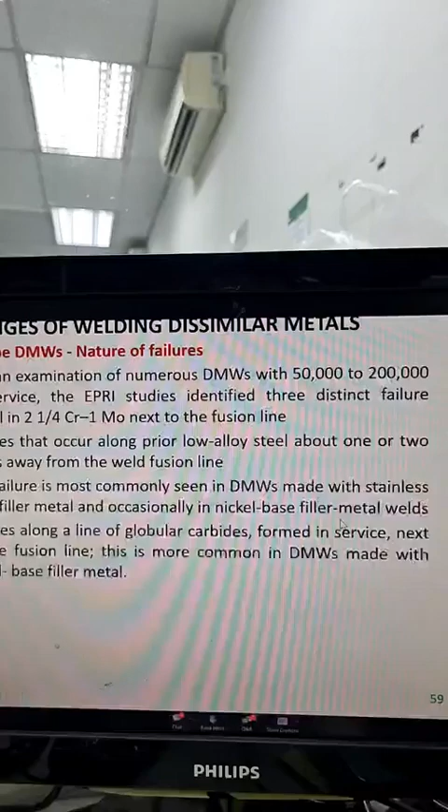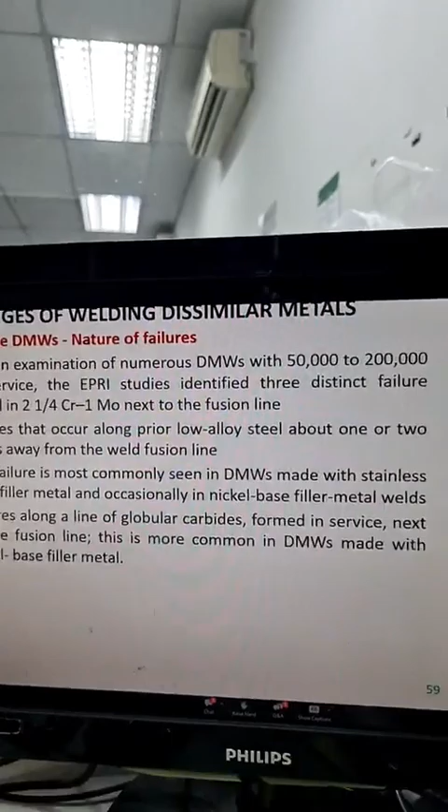Another category was failure along a line of globular carbide formed in service, again next to the fusion line. This was observed while the weld was carried out with the nickel-based filler wire.

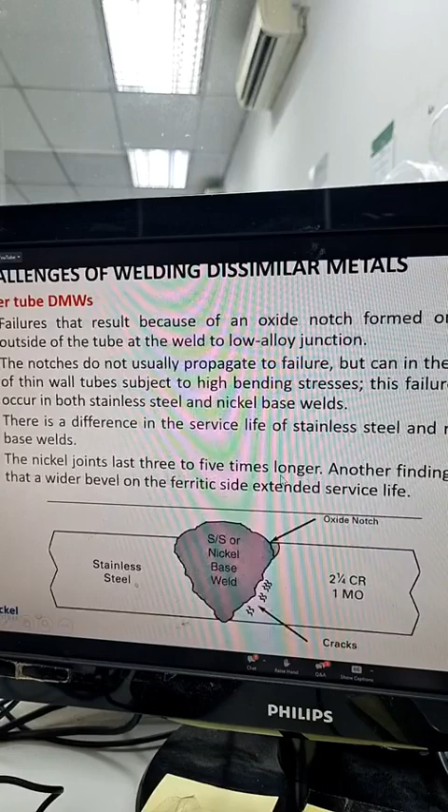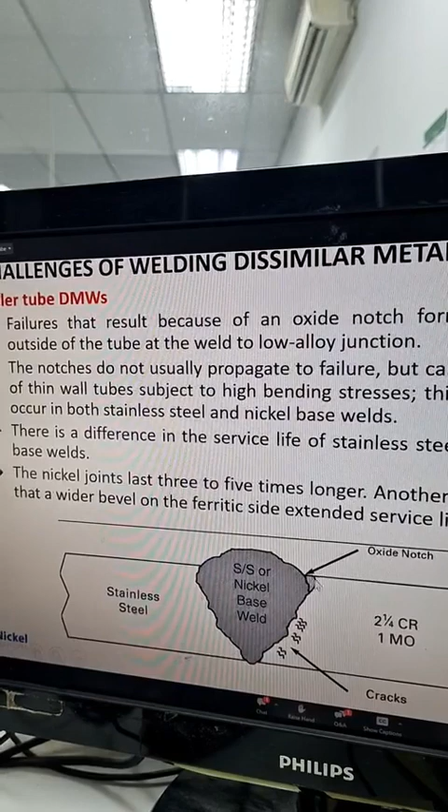Another type of failure was attributed to the oxide notch formed on the outside of the tube at the weld to low alloy junction. You can see here an oxide notch. The notches generally do not propagate to failure, but can, in the case of a thin wall tube subject to high bending stresses, initiate a failure.

What they observed was the nickel joint was giving 3 to 5 times longer life, while the stainless steel joints had a very limited life. Another finding was that a wider bevel on the ferritic side also extended an increased service life.

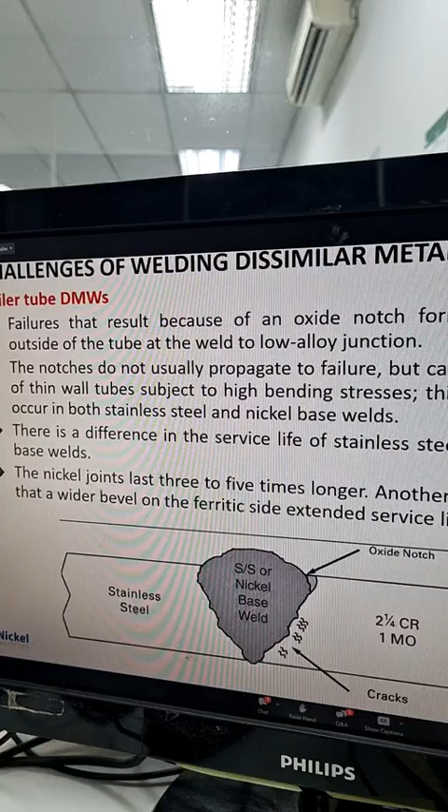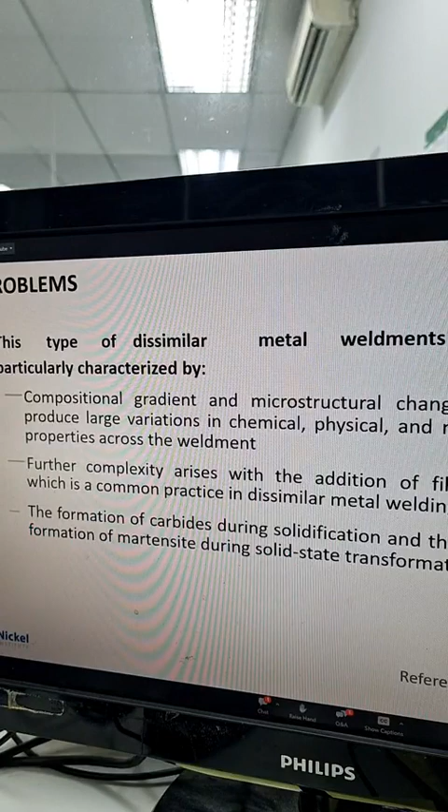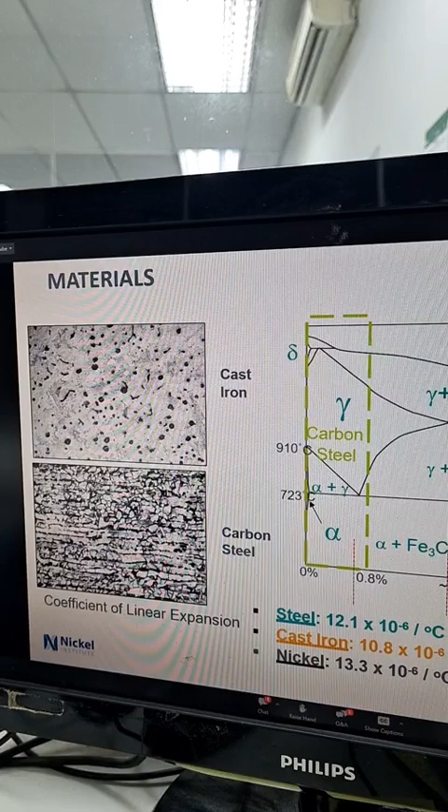So what was observed was there is a huge crack at the HAZ when they tried welding it without a buttering layer.

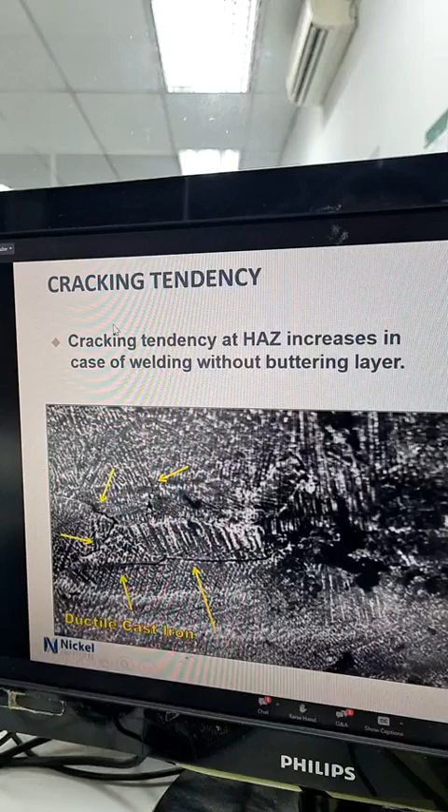The hardness also you see in the heat affected zone without a buttering layer with different consumables like ENi-C1, ENi-Fe-C1 and 7018. The hardness values were quite high, though it was a little less with 7018.

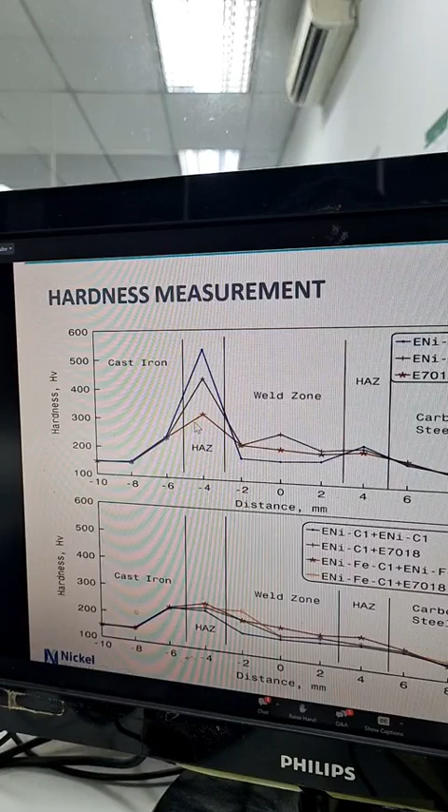But when a buttering layer was produced and then subsequently it was welded, the hardness values were relatively low, and that is how you should tackle the situation.

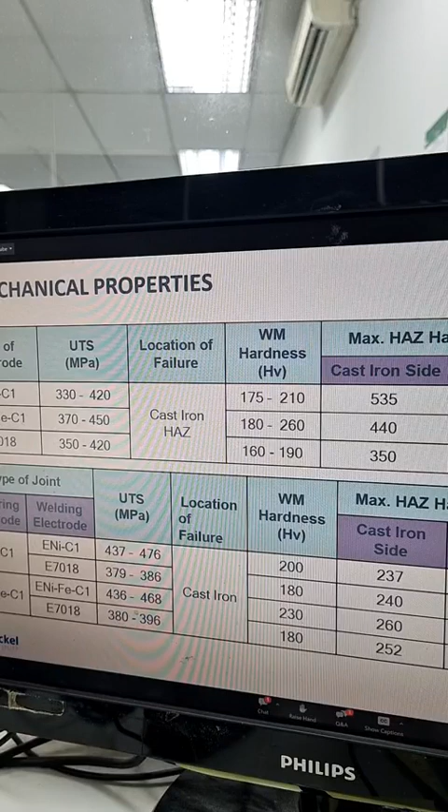Even today this is a real challenge to weld these two, because you have different microstructure, different strength, and different coefficient of thermal expansion. A lot of study goes behind deriving such procedures.

A few more examples: the hydrocracker reactor, where you have 2.25 chrome 1 moly quarter vanadium which you need to join to stainless steel 347. If you see the difference in the yield strength of these two materials, elongation, they are vastly different, and the thermal conductivity, you can see how they differ, and even the thermal expansion coefficient.

For alloy steel, if you consider 12.5, and for stainless steel it is around 16.5, there is a huge difference. So the weld procedure which you develop has to be thoroughly studied and verified before such things are put into application.

This is a very common joint which comes in a hydrocracker reactor, and generally these are handled with the Inconel 600 buttering on the chromoly vanadium side, subjected to very high temperature PWHT. To add to complications, you also have stainless steel weld overlay on the ID.

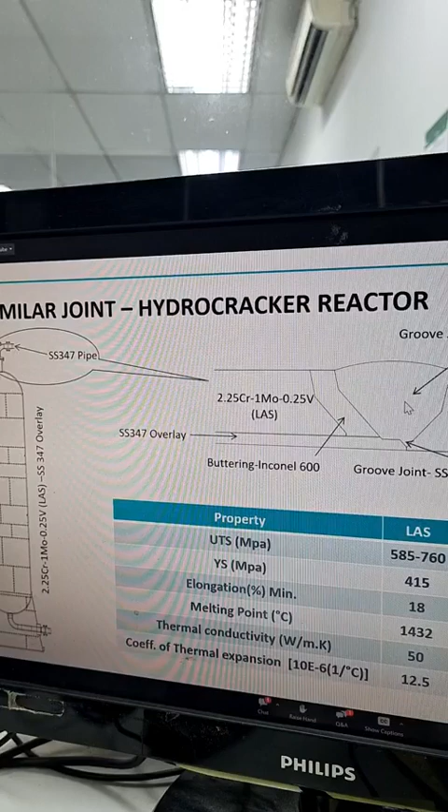So the joint which you produce subsequently, you will have 3 welds to handle. One is your buttering, one is your 347 weld overlay, and also the groove joint which you are filling up with Inconel 600, and your stainless steel 347 on the right hand side.

So you handle 4 materials plus your chromoly vanadium - 5 different varieties of materials while you produce this joint. Proper metallurgical study is very much essential, or else you will end up in big problems either on the shop floor or while this is being subjected to service.

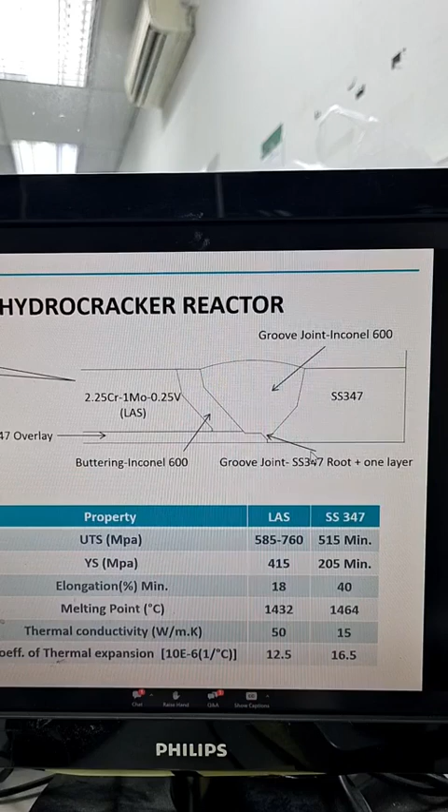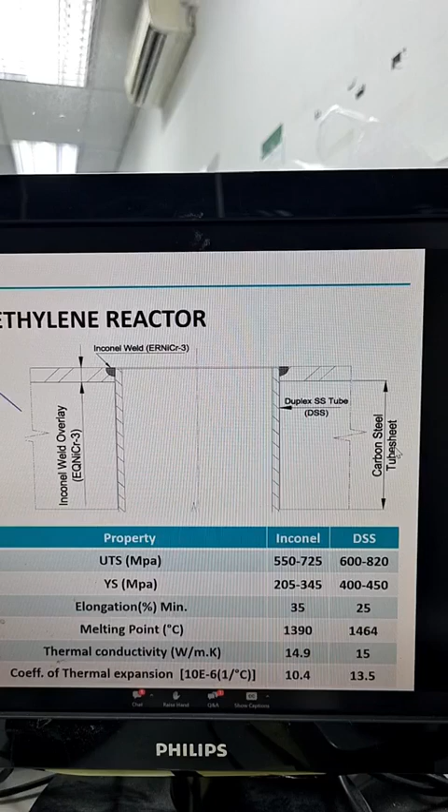This is another example in the case of a reactor where you have very critical tube sheet welds, where there is an overlay of Inconel on the tube sheet and your tubes are of duplex. It becomes much more complicated - how do you join a duplex to an Inconel?

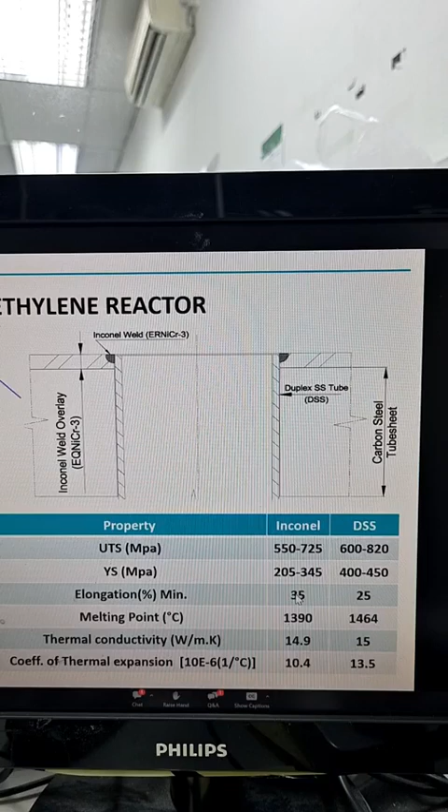Generally these are done with Inconel 600, and you see the difference again in the basic physical properties and the mechanical properties as shown in this table.

Still a lot of research is happening in this area, where you need to join stainless steel to Inconel, and Incoloy, and then Incoloy to modified 9 chrome 1 moly.

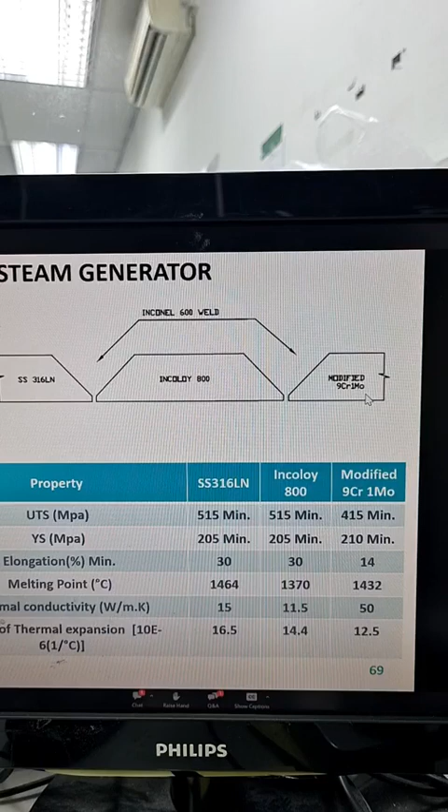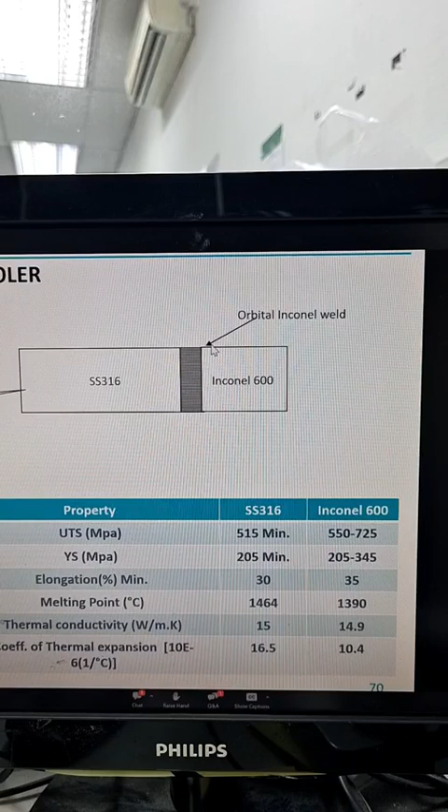Another combination in a tube to tube in a reactor where you weld stainless steel to Inconel 600. There is a requirement of producing these welds defect free with orbital welding technique, because what you require is a totally defect free joint as the service is highly critical.

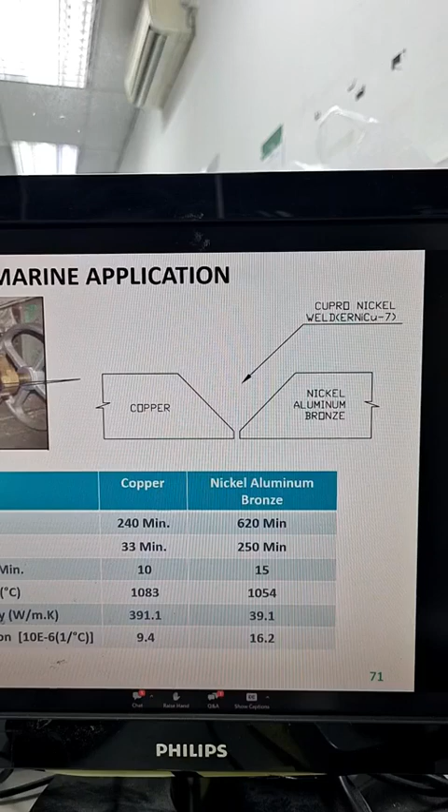Again a copper to nickel aluminum bronze. Here also there is a huge difference in the properties. So the consumable which you select needs to balance or rather take care of both the base materials so that it can suffice the purpose.

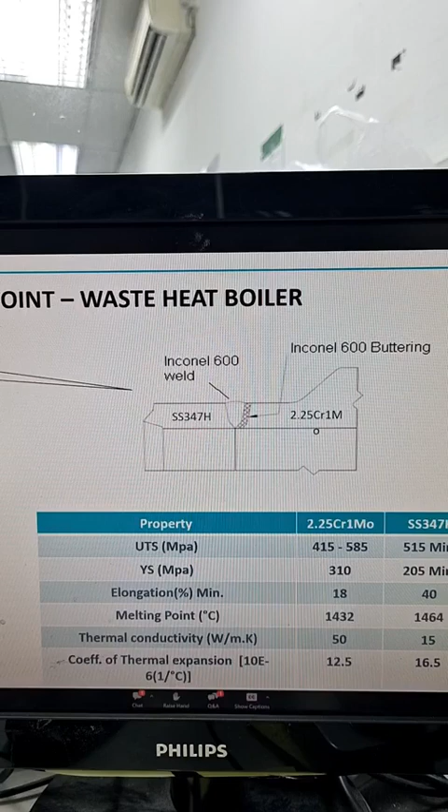Another waste heat boiler which is generally used in the refinery or in the fertilizer industry. Again you have 2 quarter chrome 1 moly on one side which is joined to SS347H. So generally you do it with an Inconel buttering, subjecting the 2 quarter chrome to PWHT and again join with Inconel 600.

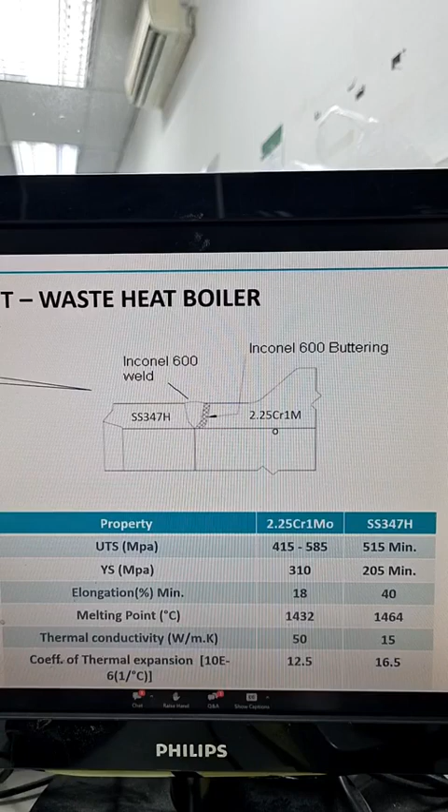What I would like to bring out here is there is a lot of science behind all these joints, lot of thought process, lot of studies, lot of research has gone into deriving this procedure, and many things have kept evolving over a period of time based on the failures which have happened in service at various petrochemical plants, refineries. The field is still evolving because there are still a lot of challenges in dissimilar metal welding.

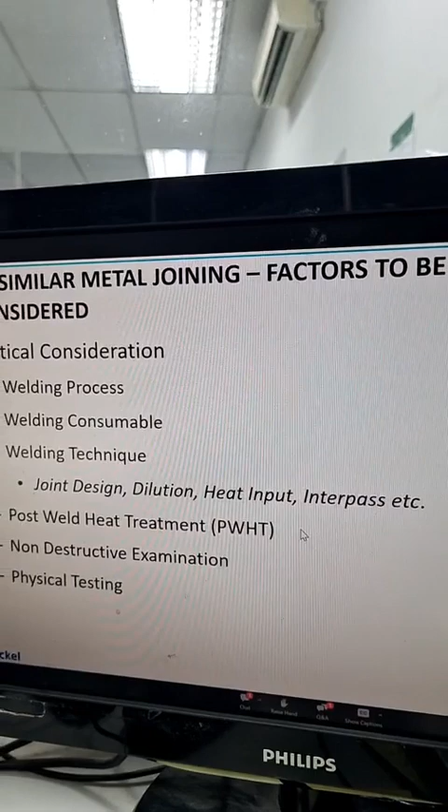So as we are getting into the conclusion part, you need to take care of the critical aspects like welding process, welding consumable, the welding technique, within welding technique, joint design, dilution, heat input, the interpass, what PWHT you are subjecting it to, and what NDT you are planning to do on the joint, and what physical testing you are subjecting it to during your procedure qualification.

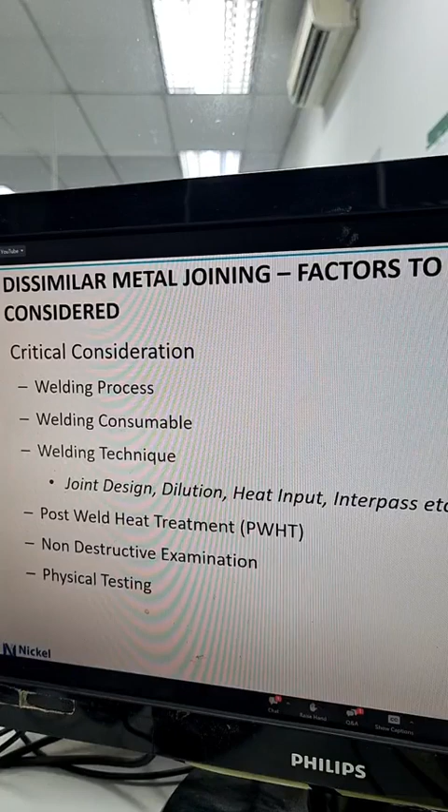The welding practices like whether you are doing a buttering or not, how you are going to select your welding consumable, is it required to add a transition material similar to what we saw in the case of the steam generator.

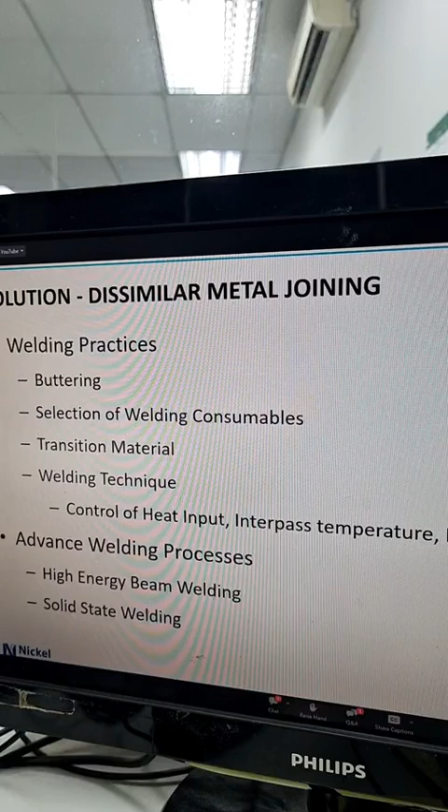And also there are possibilities to use advanced welding processes like electron beam, and you have a lot of solid state welding processes. We saw this in detail. The best way is to produce with an Inconel buttering and a subsequent joint with Inconel.

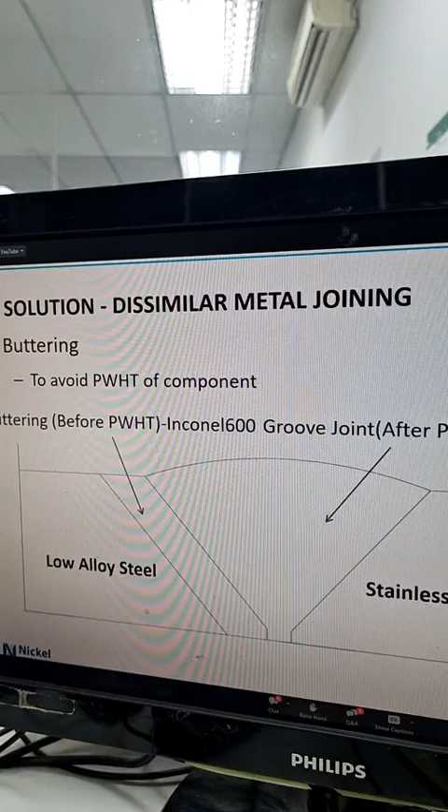And regarding the consumable selection, based on the material combination, you need to plan things around, like whether it's a ferritic steel to austenitic stainless steel, and what is the temperature my weld will be subjected to. As a thumb rule, less than 315 you can go for a 309L type, and more than 315 nickel is preferred. 310 is a good option, but when you have PWHT, that is not the right option. You need to consider those aspects.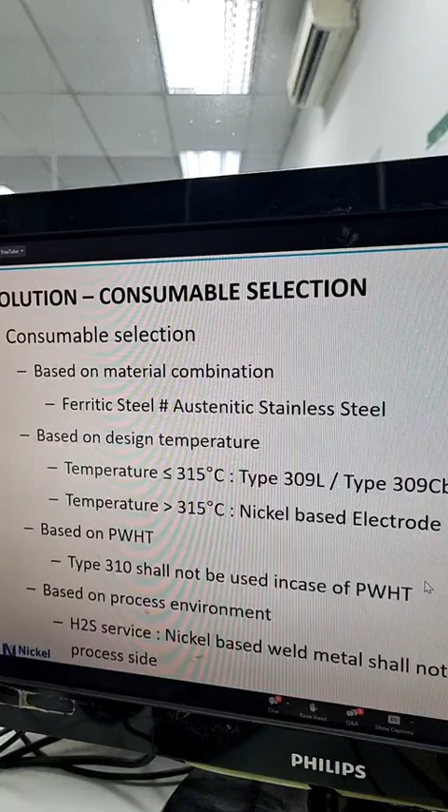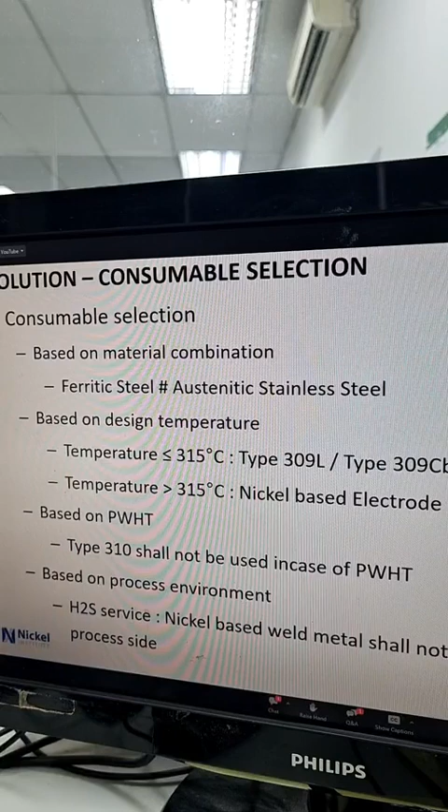And nickel is not the solution to everything, because nickel you cannot use in hydrogen sulphide service, H2S service. Nickel has got enormous advantages in case of dissimilar joints, but there are certain cautions or precautions that also need to be addressed while you decide or plan to use nickel for a dissimilar joint.

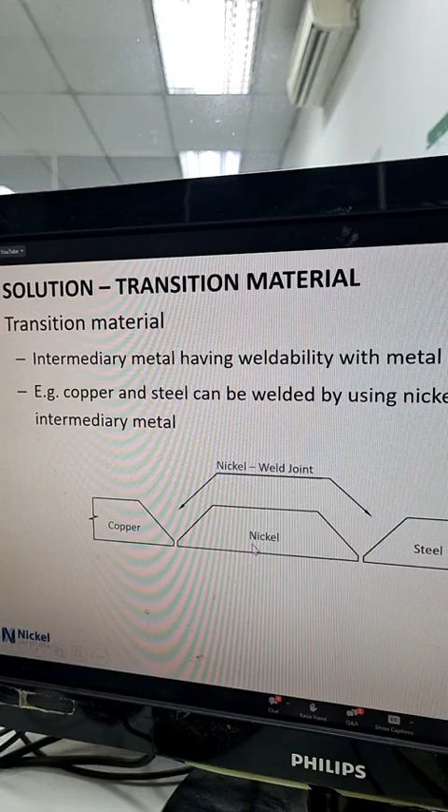And a lot of good practices during your welding technique, like the process which you select, the bead sequence you plan, the amount of bead overlap you give. You need to get into all such nitty-gritties while deriving your weld procedure.

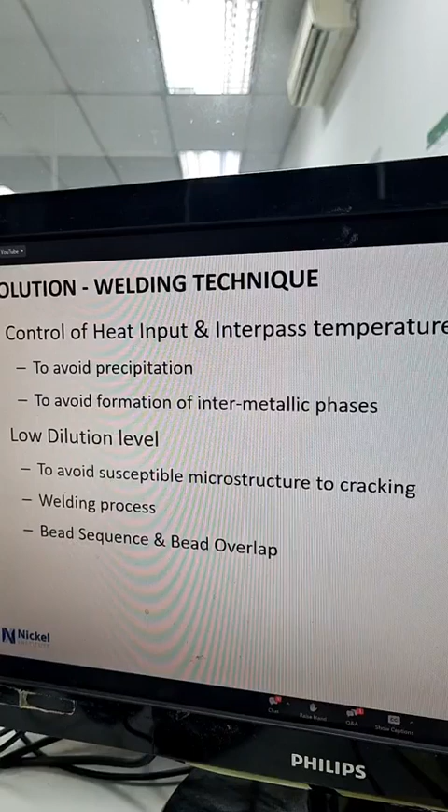So there are, as I explained, high energy beam welding processes like laser beam. For joining materials with considerable difference in melting temperature, you can explore laser beam welding.

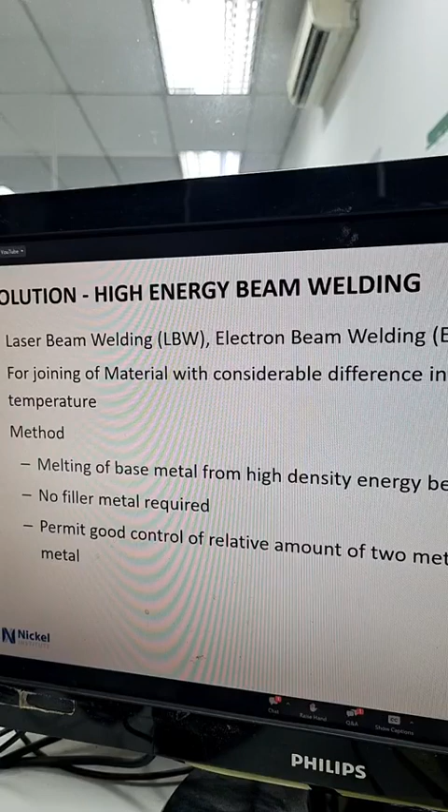Advantage is it's a very focused arc, no filler is required. So your dilution is going to be very minimal because you are not adding any external filler wire here. Your weld will be much better when compared to your arc weld.

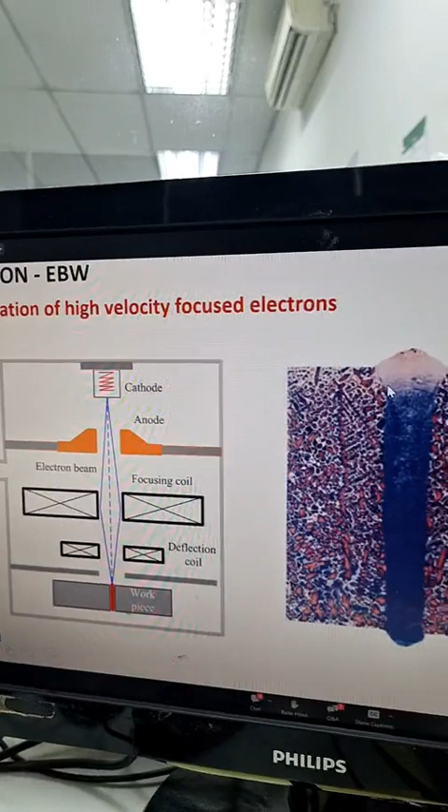So you can see how the penetration comes in case of electron beam welding. It's another high potential process which can be explored for dissimilar metal welding.

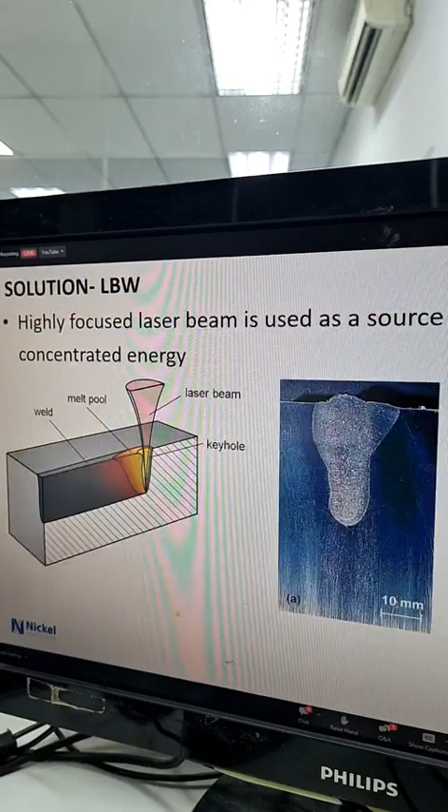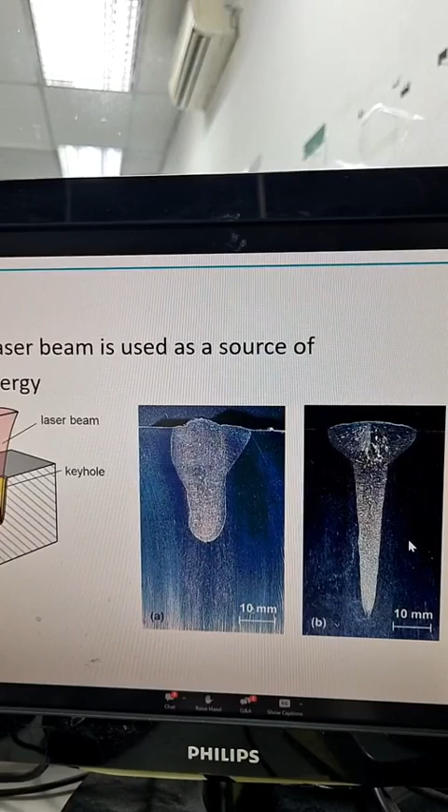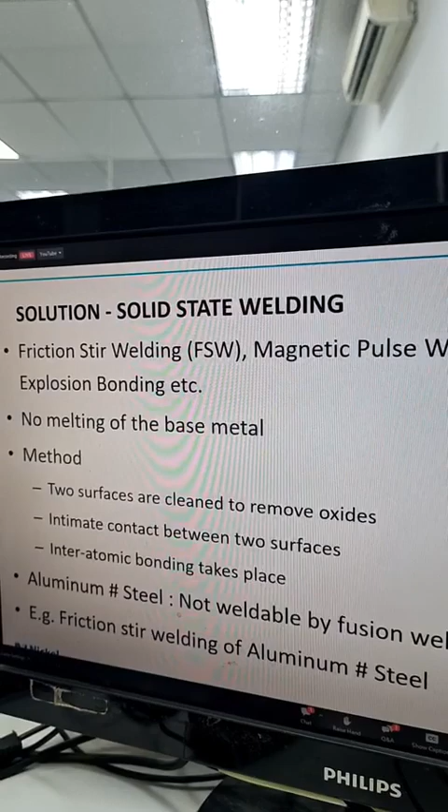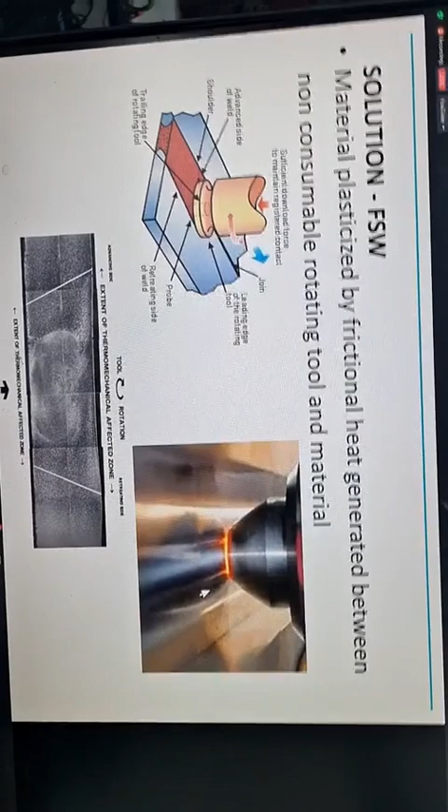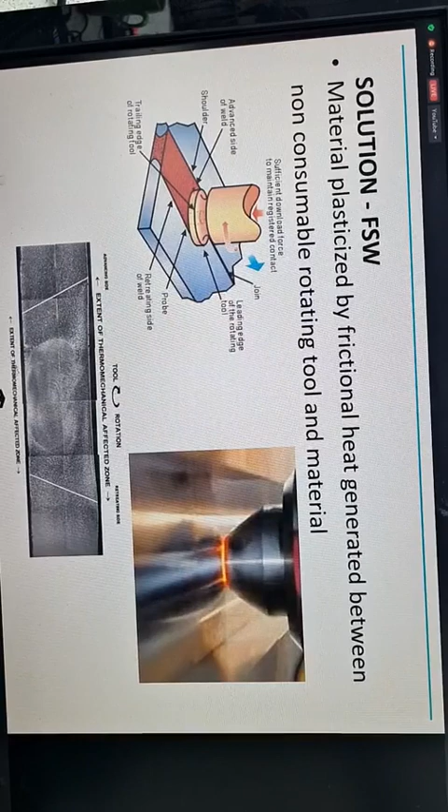Then you have friction stir welding. For example, to join aluminium to steel, which are not conventionally possible with fusion welding, you have solutions with friction stir welding, and a lot of research is happening worldwide on this. This is a typical FSW setup where you use a tool and these two metals are joined. The biggest advantage is it is not exposed to the melting point of either metal, but there are a lot of associated challenges which researchers are still working on.

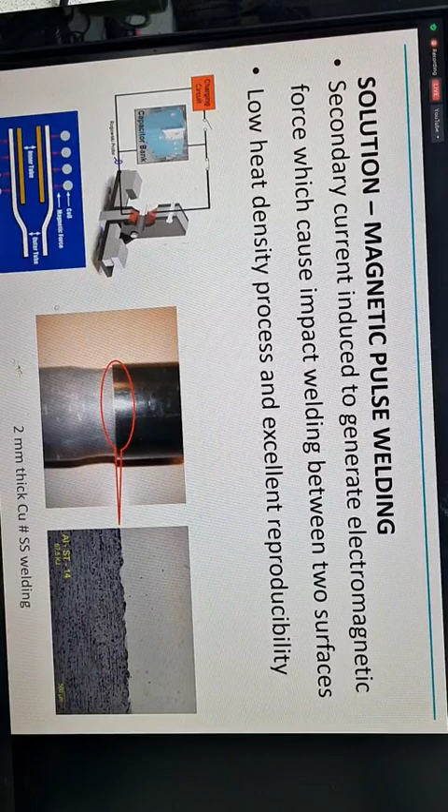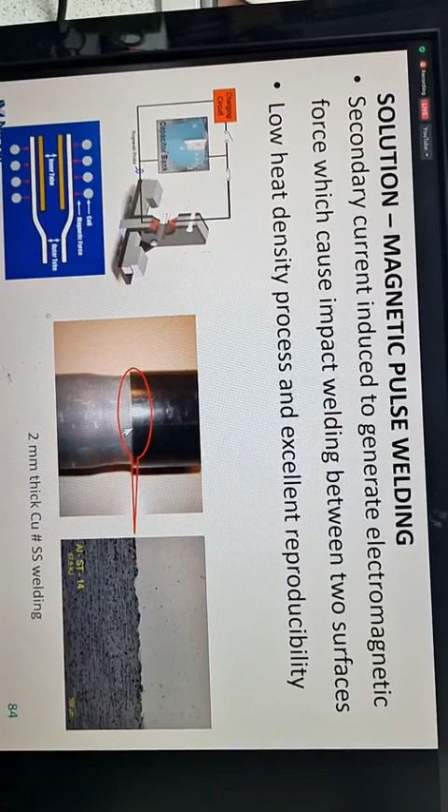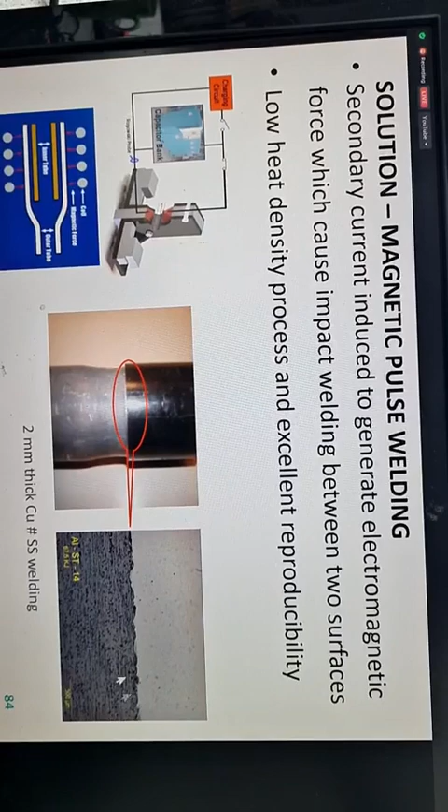This is an interesting process known as magnetic pulse welding, used when you have intricate small shapes having dissimilar metals. The photo shown is a 2 mm thick copper to stainless steel welding, and you can see how beautifully it has got joined, as seen in the micro photograph. It's a low heat density process with excellent reproducibility, and this has been used very widely nowadays in the nuclear industry, where you have very intricate shapes to join and the materials are dissimilar.

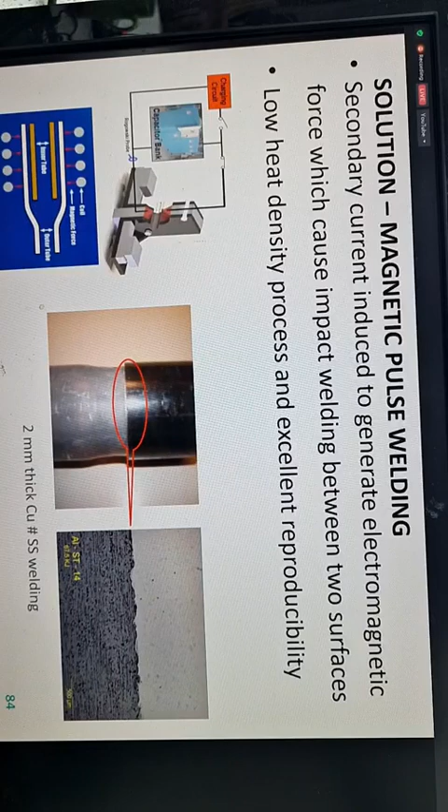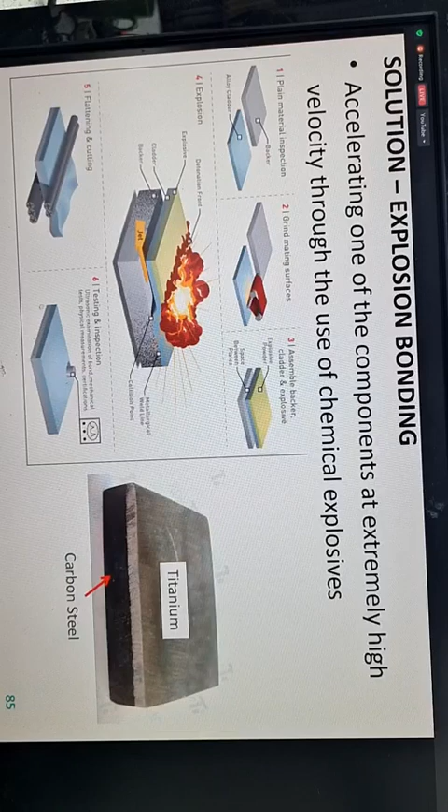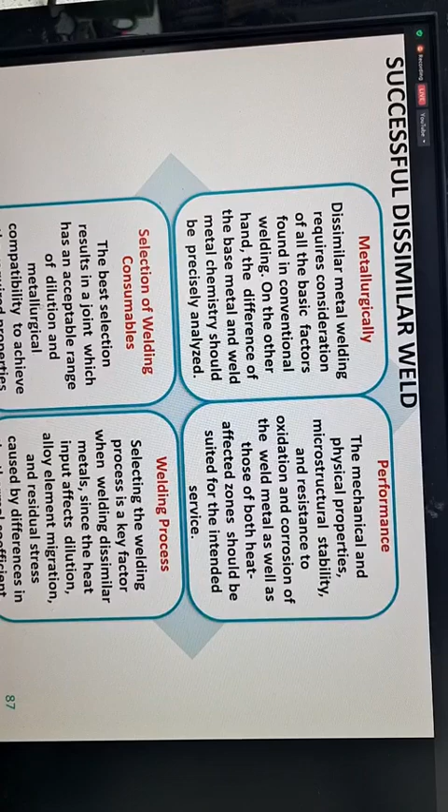As I conclude, for dissimilar metal welding I need to consider 4 aspects: metallurgical, performance, welding process, and selection of welding consumable. In metallurgy aspects, this requires consideration of all the basic factors found in conventional welding. On the other hand, the difference of the base metal and weld metal chemistry should be precisely analyzed. So the welding engineer has got a major role in handling this part.

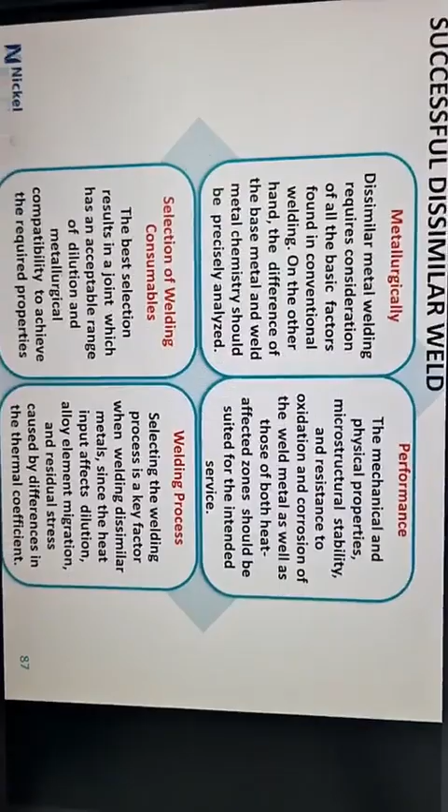Regarding performance, the mechanical and physical properties, microstructural stability, and resistance to oxidation and corrosion of the weld metal, as well as that of the heat affected zone, matter. Generally we are worried only about the base metal, but what is more critical is the weld and heat affected zone. That area should also have similar properties as the base material, which is a very big challenge for the industry today.

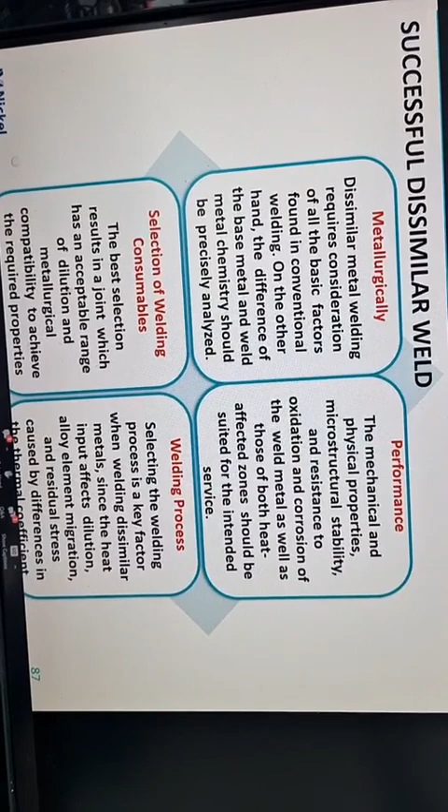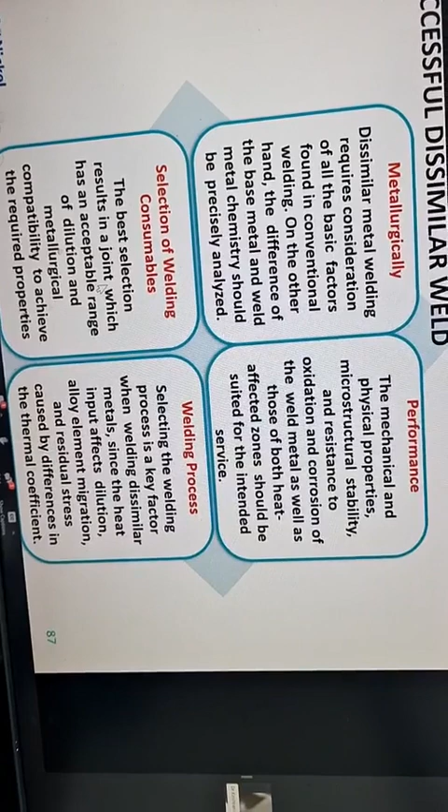The welding process you choose depends on various enormous factors like the heat input you want to deploy, which is directly attributable to the dilution, the alloy element migration, and the residual stress produced in the joint. All those need to be addressed while you select the welding process. And the selection of a suitable welding consumable, which I was trying to explain in many slides, has a lot to do with your dilution and the metallurgical compatibility with the two materials you try to join, in order to achieve the required properties.

So with this slide I conclude my presentation, and thanks to all of you for being with us today.